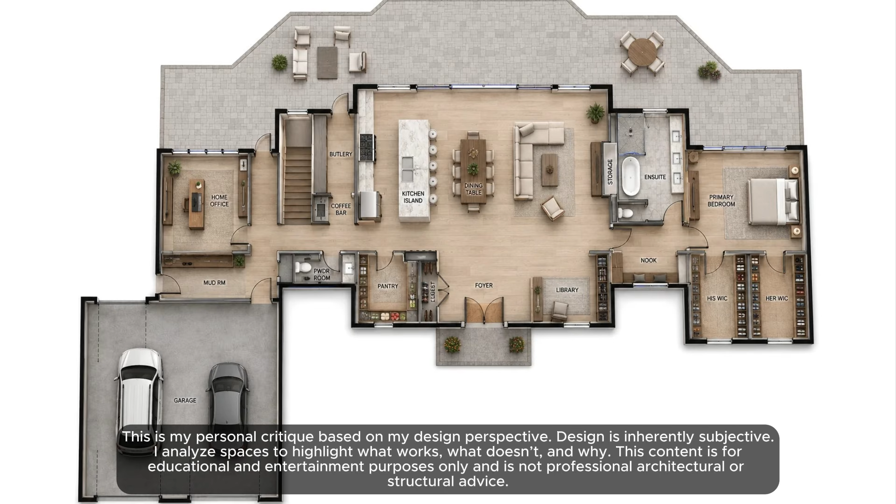Today we're analyzing an architect's personal home floor plan to see how much we can improve upon. This house is situated in Muskoka, Canada, and it has already great bones, and let's see how we can refine the interiors to make the most out of the space.

So let's start with a run through to get you familiarized with the project. Here at the entry, on this side you have a library, you have the coat closet, you have the living dining kitchen, and then you have a pantry. On this side here you have the powder room. Here, this little section is a coffee station, and here this is a butlery room. Then you have the stairs going down to the basement. This house is only one level plus the basement, that's it.

Then you have the office, then you have this section over here that opens up to the garage. This is a mud room. You have a little linen closet, and then you have a spacious garage over here.

On the right wing of the house, you have the master bedroom. You have this little entry here. This is a nook, but it's like a bonus space. You can really make it whatever you want it to be. And then you have the bedroom with two equal size closets.

The only request that was given is as soon as you walk into the home, he wants to see the views of the lake, since this is a lakefront property, which is so cool. But besides that, everything else, I have pretty much free reign to just reconfigure the space however I see fit.

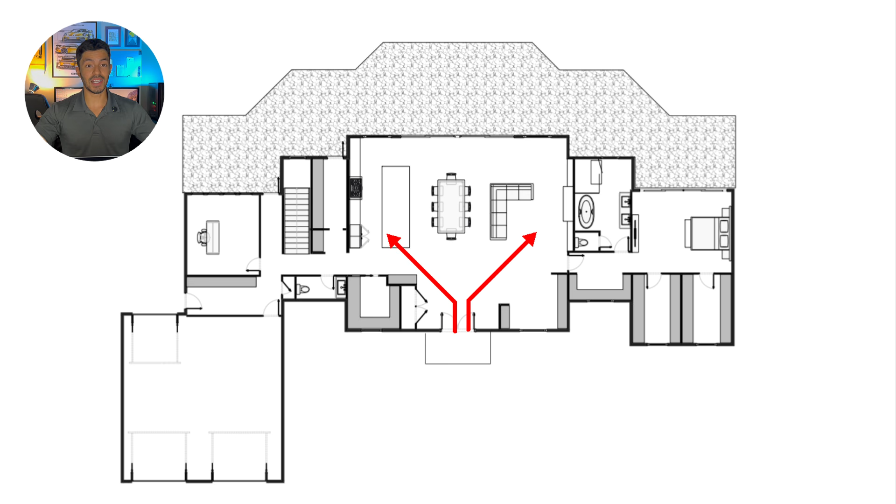The first thing that I noticed that I didn't like when I saw this floor plan is how open it is as soon as you walk in, to a point that it almost feels exposed. As humans, we have this natural primal instinct of wanting to discover things and having areas that are more secluded. The house doesn't unfold as you progressively enter through it. It just immediately gives you all it has, which is not ideal. You always want to strike a balance between feeling open but also feeling intentional.

So there's three things that I want to fix. First is the library, because this corner doesn't feel like a library. It just feels like a corner of a much bigger room. It doesn't feel like I would want to read there.

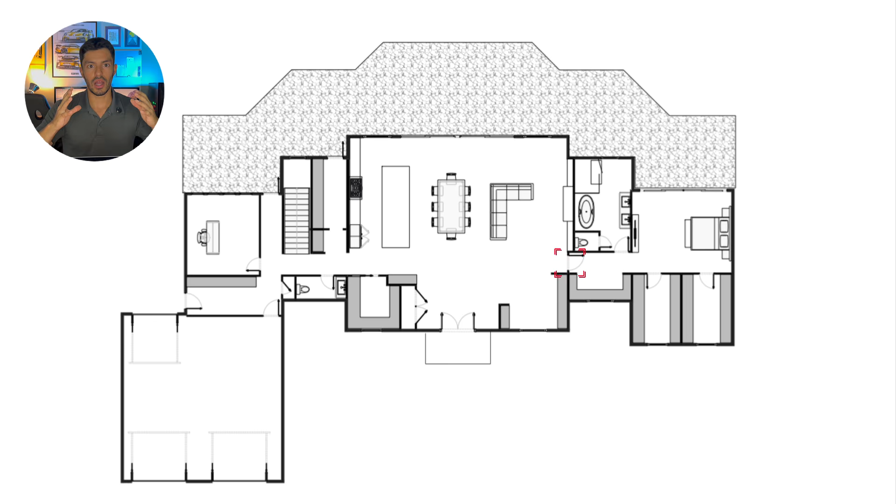Also, the entry for the master bedroom, the transition from common areas to private areas is extremely blunt. It's extremely exposed. I don't like that.

And the third thing that I want to change is the location of the staircase, because we have to remember this is a lakefront property. So right now the stairs are taking linear frontage, giving access to those views, and the staircase is not that important to have those views. So we can definitely maximize those views for the kitchen later on.

So let's start by emptying the bottom right corner of the great room. I would place the staircase in the foyer because it adds more depth and it just creates more interest as soon as you walk in. And then with the space on the right, I would actually create an enclosed library and also create a little passageway that tucks in to give access to the master bedroom.

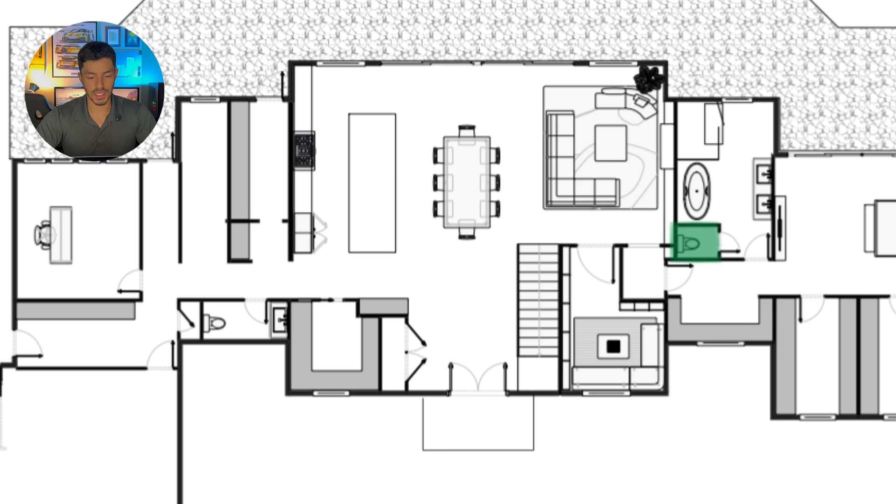Now I'll quickly rearrange the living room furniture. And since we created this little passageway, the wall intersects with the shelving and it creates this little square of empty space that is wasted. So what we can do is simply move the water closet to the left to make the bathroom bigger and not waste any square footage.

I'm gonna stop the frame here for 3 seconds and see if you're able to identify what my next tweak will be. It's not a major flaw, but it's definitely something that can be improved upon, and if you need more time, feel free to pause the video.

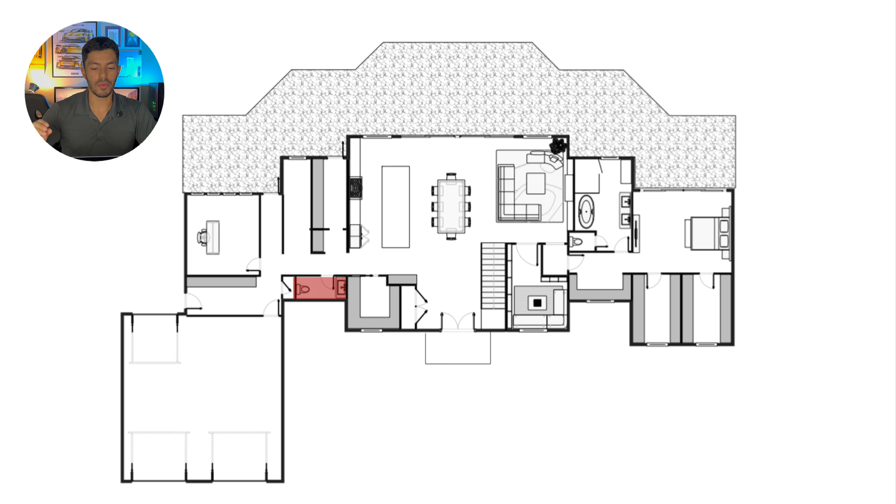Another thing that I wanted to tweak is the powder room location, because right now I feel like it's a bit removed from the main living areas, and I wanted to have something a bit more central and closer to the entry. So let's start by removing the pantry and the existing powder room.

For the coat closet, I'm going to give it sliding doors instead of opening doors. That way I can really maximize the footprint of the foyer. And behind the new coat closet is where I would put the powder room. This can be a little bit reminiscent of the entry bedroom hallway, where it's more tucked away and secluded.

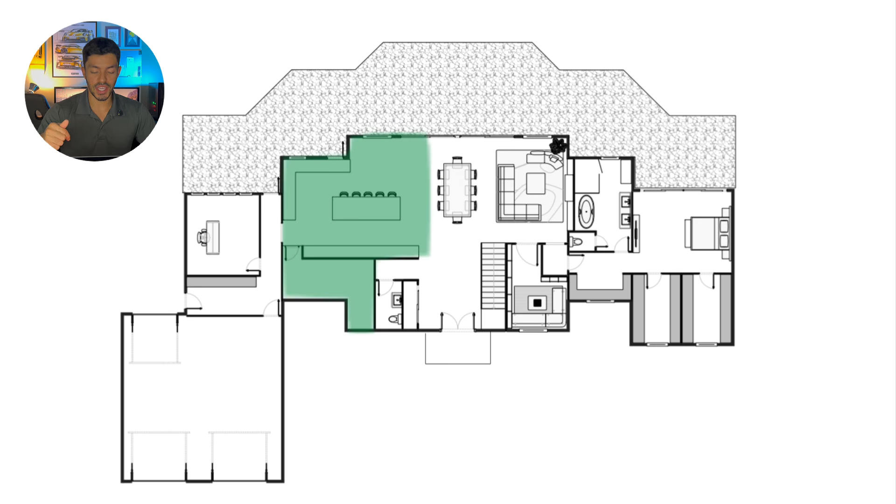We have the same thing for the powder room, and since we have a lot of square footage to work with, we do have the luxury to insert those little hallways that create enough separation to not feel too exposed. And left of the dining, we're going to utilize that whole space to create the heart of the home, which is the kitchen. What's great is that right behind the kitchen we have access to the pantry. If you remember, in the original floor plan, the pantry was kind of disconnected from the main kitchen because it was bifurcated by this main hallway. Now everything is close together and it feels like the same continuous space.

Now here you have an empty corner that is pretty big, and you definitely don't want to have that wasted square footage. So you can give it some function by adding a breakfast nook that utilizes the entire space perfectly. Next, we fit out the kitchen with the appliances.

As you can see here on this main wall, I created a little indent for the fridge so it's not sticking out against the cabinetry of the kitchen.

The reason why I put the sink, stove, and fridge close to each other is because of the kitchen work triangle theory, and you'd want those three appliances as close to each other as possible to minimize unnecessary walking.

This is the best solution I could come up with, because I absolutely wanted the sink against this wall. This kitchen is much bigger than the previous one, and what's great is that this main wall is sufficiently big enough to house the coffee station that was there on the original floor plan.

But we also have to remember that it also had a butlery, and it also had two hallways. Now I removed one of those hallways, so we're left with one, which is kind of underutilized—just basically two plain walls with no purpose besides letting you outside.

So what I would do is give that space some utility by carving out a little bit of square footage from the office to create storage for a butlery area. That way you're not losing the butlery, but you're also giving some sense and purpose to that little hallway.

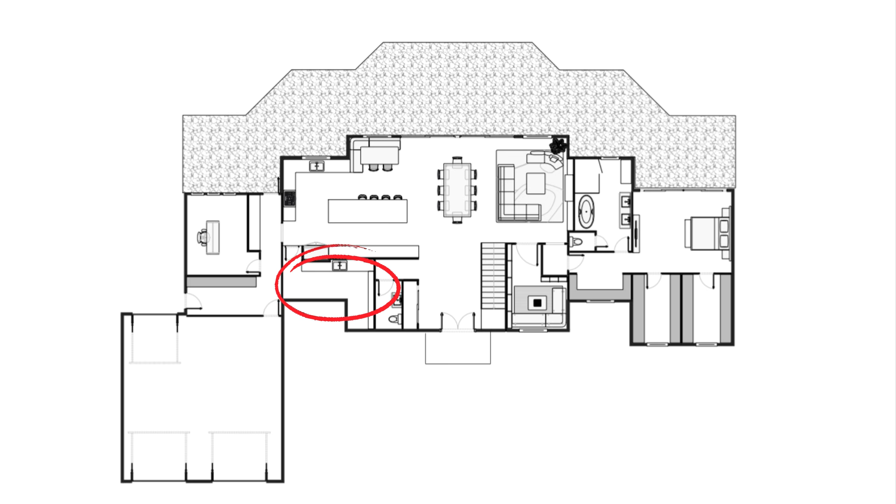I do have to say that the pantry as it is could easily double as a butlery room, because you have enough counter space to prep your meals, and you also have a sink.

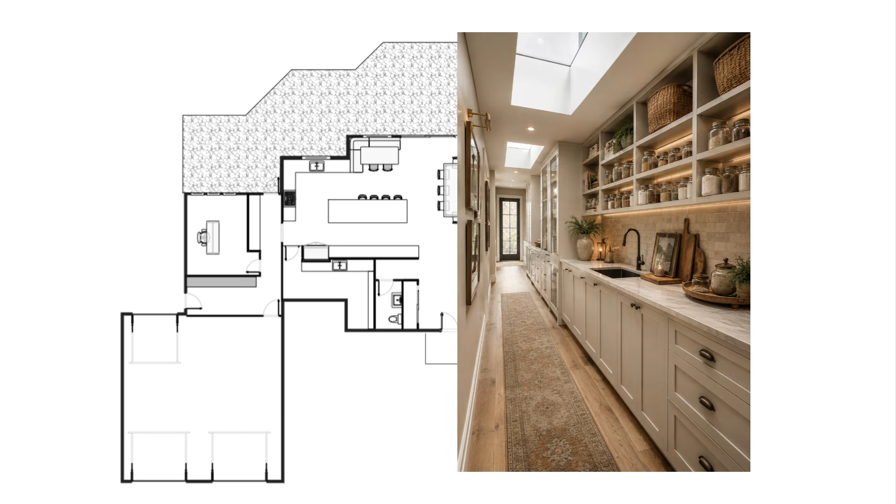The area I carved out from the office was more so to respect the integrity of the original floor plan, and that area doesn't necessarily have to be a butlery if the pantry space works better. It could also just be storage area, or it could even be completely deleted and leave the office as it was.

But if you do end up putting storage there, I wouldn't be too concerned about circulation, because nine times out of ten the area is going to be clear and you'll be able to come and go easily.

And since this house is very symmetrical from the outside, I made sure that the interiors would allow for windows to be evenly spaced so the facade looks uniform.

We're going to migrate outside to work on this terrace because I do not like it at all, since the entirety of the length of the house has the same depth, giving it the same importance—but not the entirety of the house is made equal.

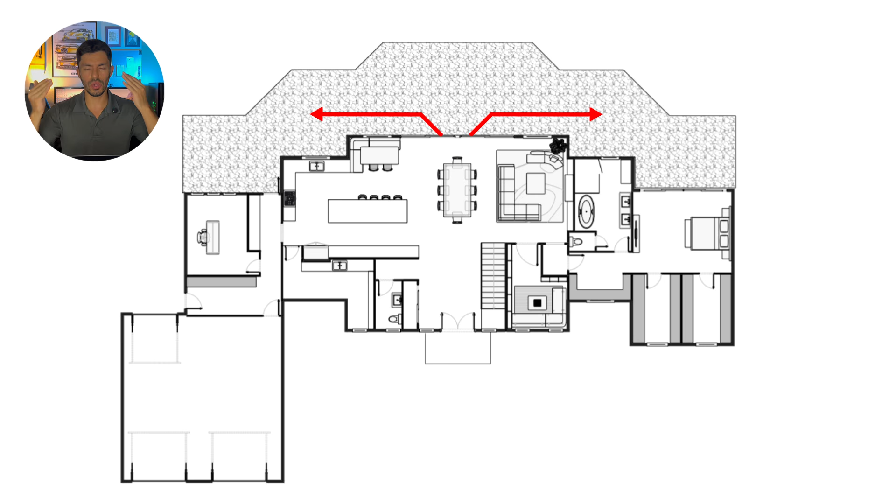You have common spaces, and you have private spaces with the master bedroom wing of the house. So as soon as you walk into the terrace, there's no real cue telling you, hold on, I'm stepping into a more private area versus a more common area where I can congregate with people.

So there's no focal point to lure people in. What I would do is simply define the common spaces for the terrace and the private spaces for the master bedroom. By squaring off the terrace, it's also much easier to furnish.

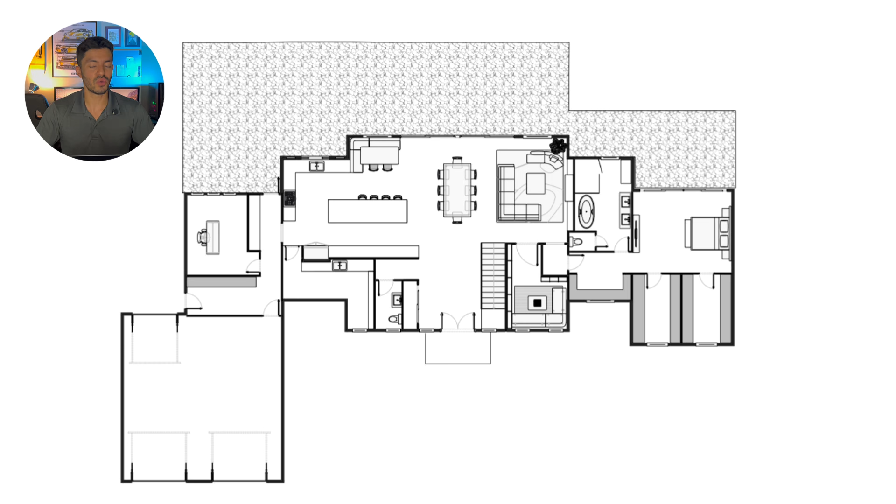You're going to utilize it more. This is a lakefront property, so you're going to be outside a lot, and this is far more useful. Not only that, but it's also easier to build, and I really don't see any downsides. Anyways, I just like it much better like this.

Now this is a suggestion about how I would furnish the terrace, and what I like is that now the architecture is speaking to you.

If you accidentally wander too much onto the right wing of the house, you start sensing: hold on, it's compressing, becoming more intimate, maybe I shouldn't be here. You're naturally going to be drawn to the opposite side of the terrace, the furthest place from the bedroom, because it has much more social magnetism.

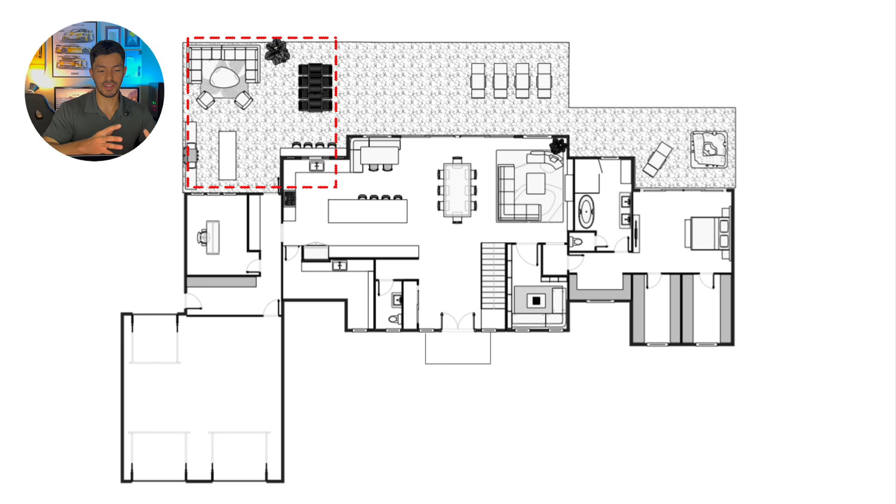Another detail I want to point out is right beside the summer kitchen, I utilized this outer corner to make a bar at the same height as the kitchen counter, and those windows are sliding windows, so you can basically turn this area into an indoor-outdoor bar, which I thought was pretty clever and a nice use of space, so you're not wasting that little outdoor corner.